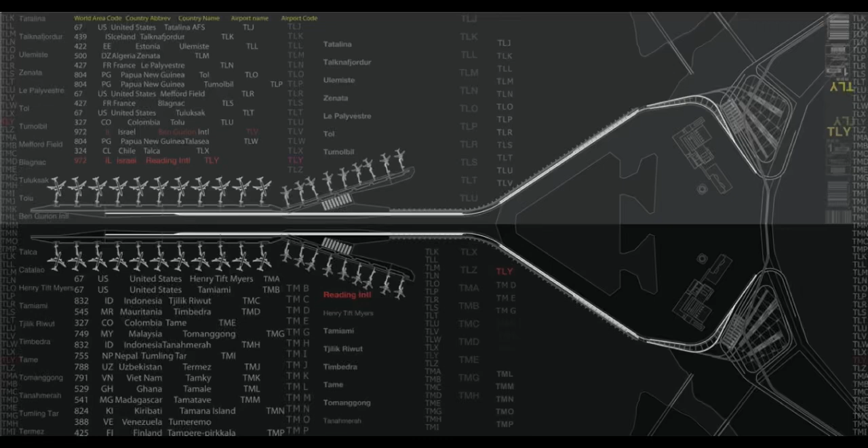There seems to be a notable paradox in the very essence of the modern airport. On the one hand, it is a 24-hour-a-day setting for the most intense kinds of human activity. In that sense, an airport terminal ought to be considered an occurrence of a genuinely urban nature.

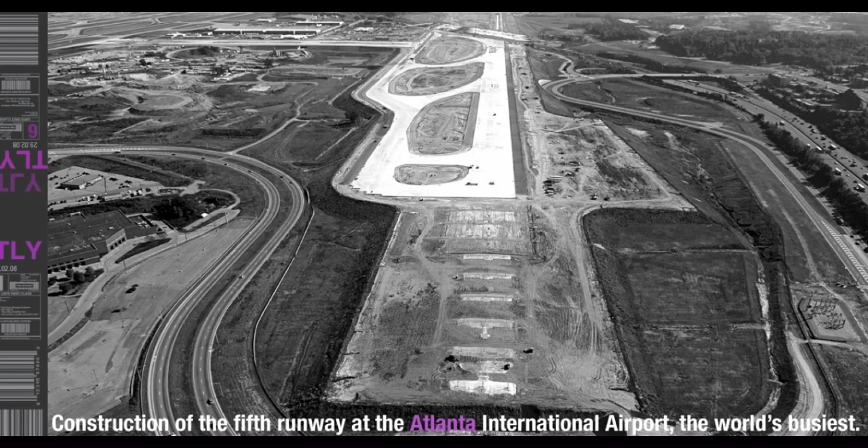Yet this intense and inherently urban constellation of programs is almost certainly doomed to be detached from the city. It generates vast residue of unbuildable territory around it. Wherever a plane lands or takes off, the city literally ceases.

Ben Gurion Airport is a typical example. Even with a recently inaugurated terminal, aviation officials forecast that in the near future it will top its passenger capacity of 16 million per year. Ben Gurion has effectively exhausted its ability to grow on the expanse of the Tel Aviv metropolitan area.

The solution, then, will probably have to come in the form of an additional international airport, relieving Ben Gurion of some of its burden. For obvious reasons, the closer to the center it gets, the more sense there will be in realizing it. The closest thing meeting this particular requirement was a scheme that has circulated the corridors of various planning agencies for some 30 years.

Yes, the one with the artificial island off Tel Aviv's shore. As overboard and audacious as it may sound, we actually liked it, thinking it might be a good starting point.

To understand the nature of such an undertaking, we enlisted the aid of the Kansai International Airport in Osaka Bay, Japan, the quintessential forerunner of this particular genre, as a reference. A short analysis led to two conclusions. The first is that landfill technology is immensely expensive, severely harmful to the environment, and overall obsolete.

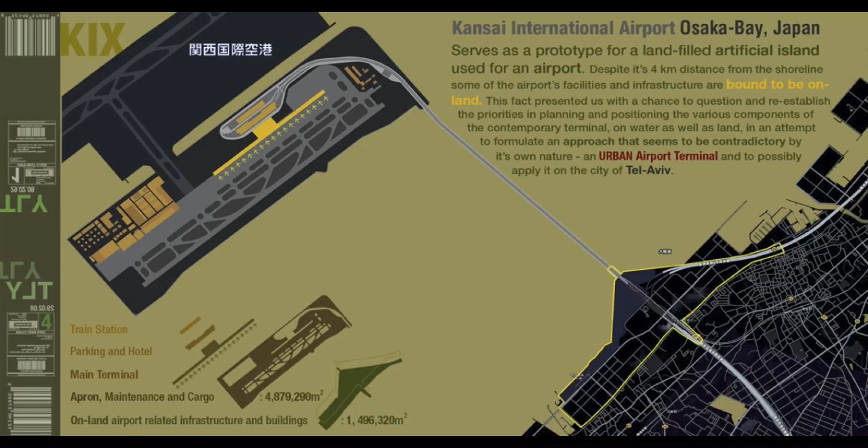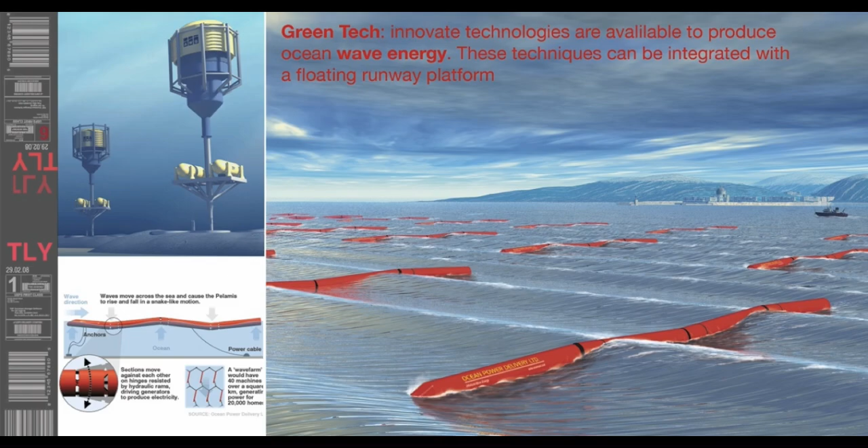Instead, it is possible today to use floating steel platforms with a runway on top, thus minimizing the negative effect on the marine ecosystem, and even turn wave motion into electricity. Secondly, a big airport cannot be located entirely at sea, and Kansai is no exception. Some of its supporting infrastructure and program are simply bound to be on land, occupying a generous chunk of it.

The realization of that later conclusion, with Tel Aviv conditions in mind, took our planning strategy one step further. This meant placing as much of the entire terminal apparatus on land as possible, effectively dividing all of its functions along the dialectic framework of man versus airplane.

This simple programmatic dissection can offer the terms to the drafting of quite a new type of airport terminal, a genuinely urban one, exploiting this condition of complete proximity to the city and acting as a densifying agent with its size to its advantage.

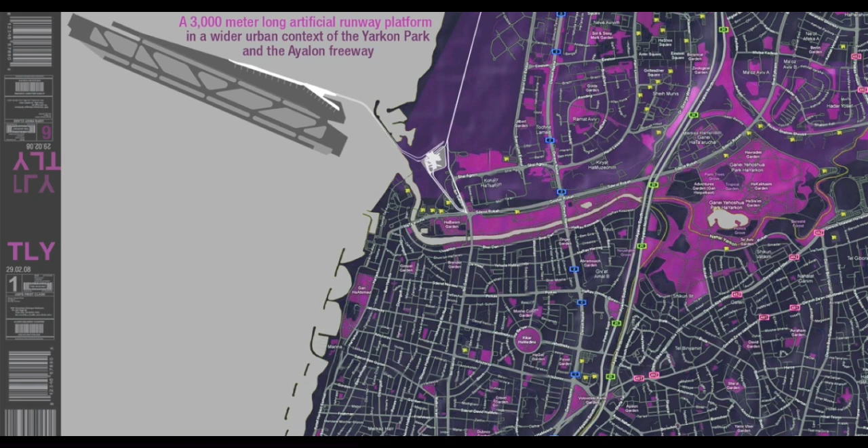Upon examination of the Tel Aviv coastline, where clearly a large infrastructure intervention can only be held north of the Yarkon estuary, a site is spotted to the southeast of the Reading power plant, situated directly behind it. The exact positioning of the runway relative to land is determined with accordance to the aircraft noise levels diagram. It allows to establish the shortest possible distance between the two within tolerable levels of noise.

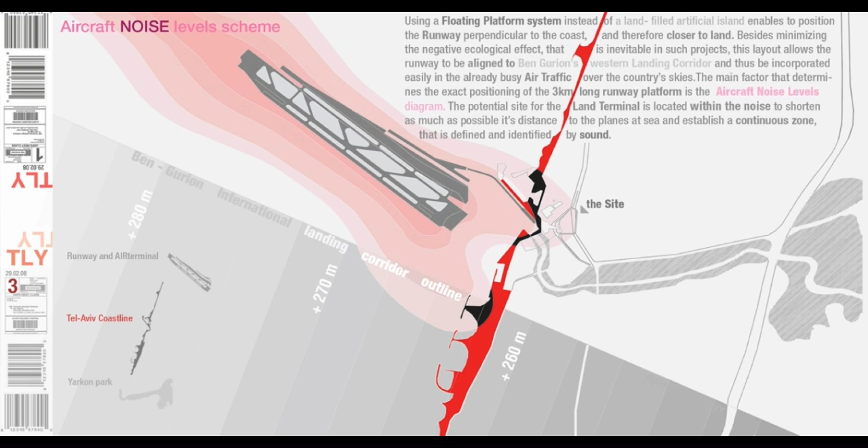In many ways, it is an urban void. Because of its sheer size and unflattering proximity to the plant, it has repeatedly escaped any long-term planning resolutions and remains an unidentified and severely neglected zone. It is possible, then, that a radical intervention on a large scale, such as being proposed here, might work in these circumstances after all.

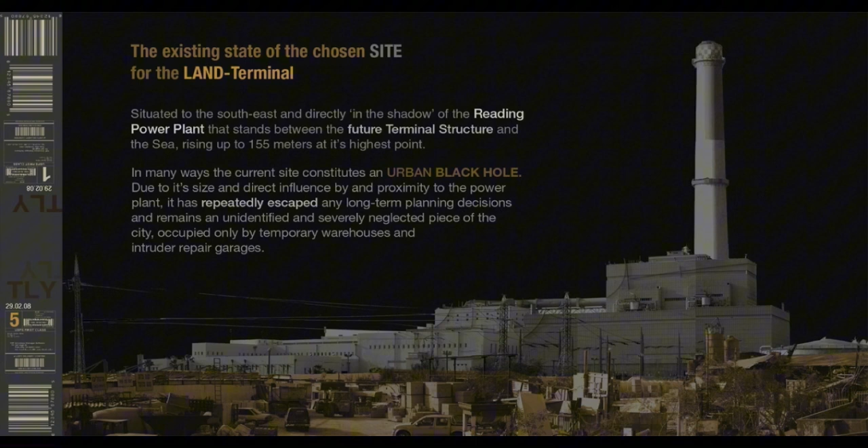The area around the site is expected to undergo a considerable development effort according to existing plans. This includes the Ibn Gvirol Road stretching northwards and the inauguration of the red tram line on it, the continuation of the port promenade along the Reading power plant in the same direction, and finally, the removal of the Dov airfield in favor of a large residential development.

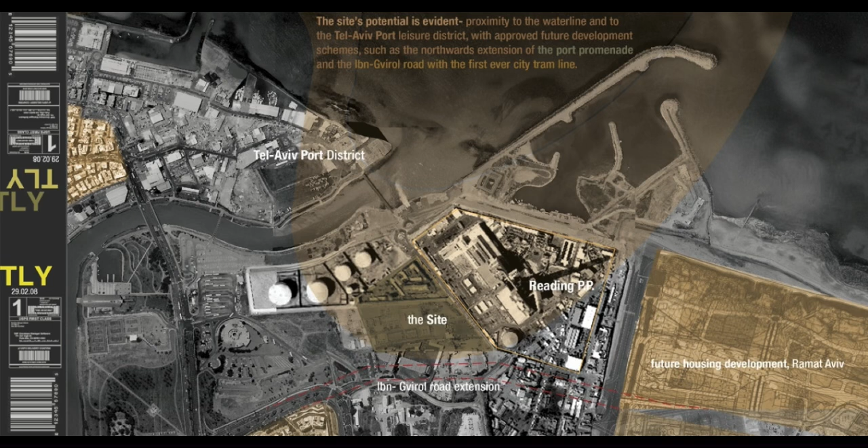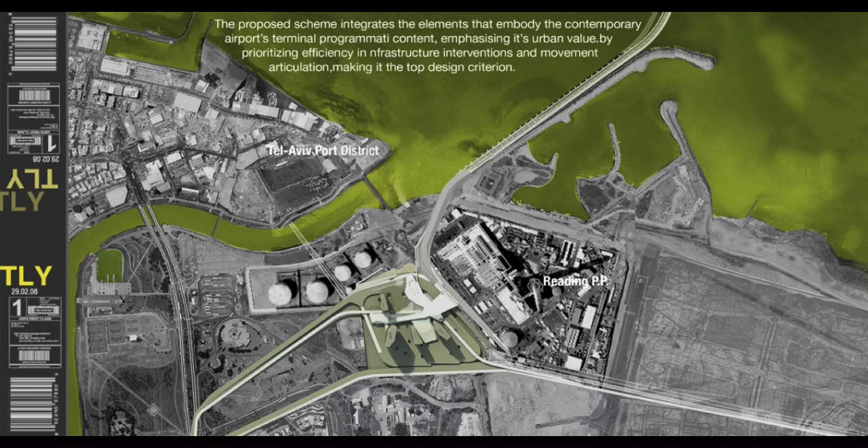The terminal structure incorporates the existing infrastructures in defining its layout. Its principal concern is movement, be that of pedestrian, vehicular, or luggage. Movement forms its priorities and shapes its architecture.

A circulation scheme is devised in accordance with four main principles. Accessibility: pedestrian and bicycle accessibility and circulation are prioritized, a feature that basically sets the urban terminal apart from other types.

Check-in: luggage conveyor belt facilities are placed throughout the building, enabling to disperse efficiently the check-in activity at a number of entry areas within the complex.

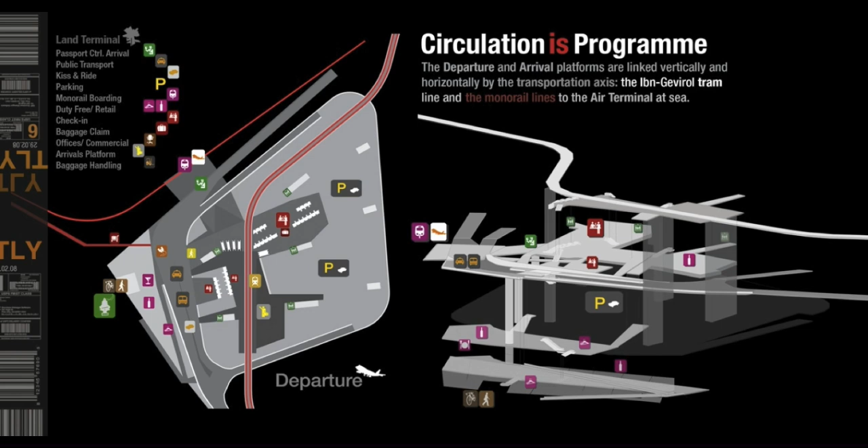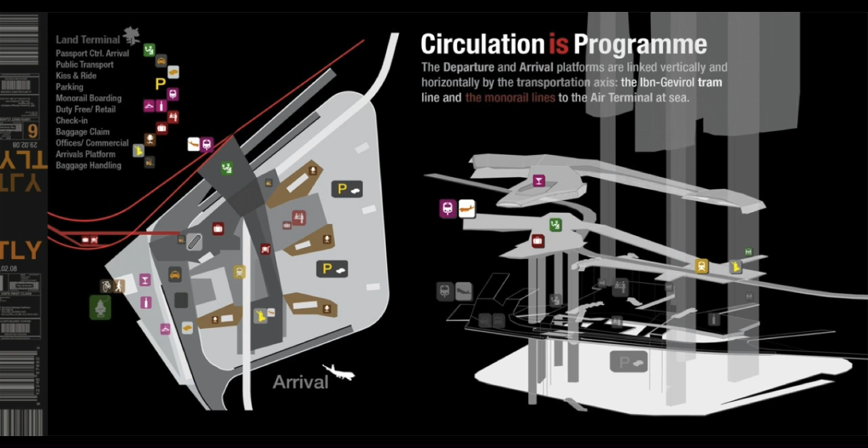Transportation axes: the arrival and departure platforms are linked vertically by the city tram line, crossing the building, and the monorail that connects them to the airside terminal at sea.

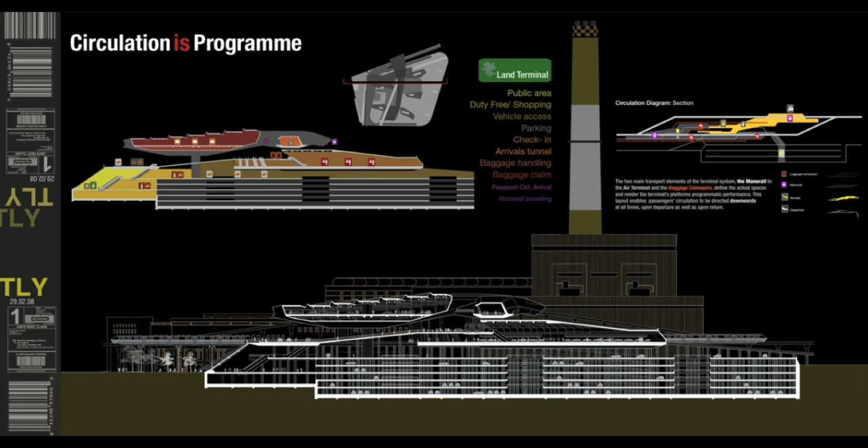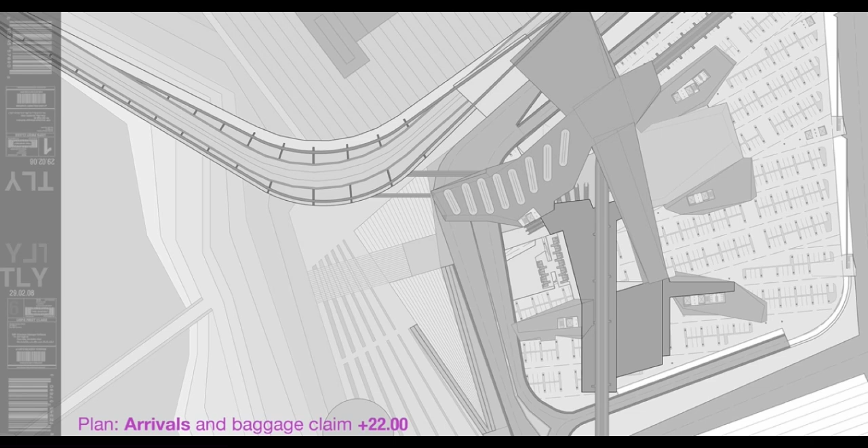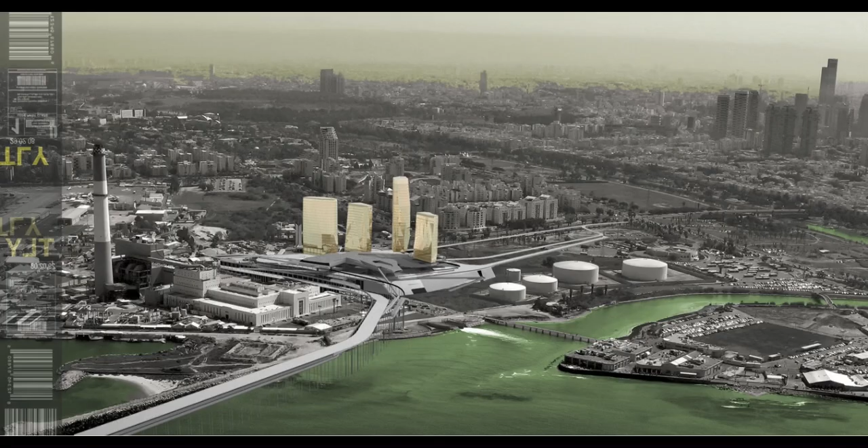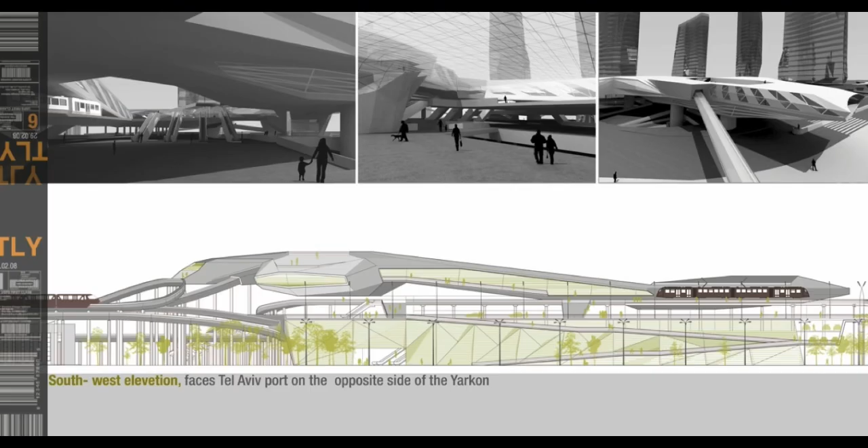Tel Aviv's Port District is assuming a greater role in providing a setting for various leisure and commercial programs in recent times. This area bears certain embedded urban features that can be exploited and reinforced. We propose to do so by introducing similar programs, only in a much denser envelope on the other side of the Yarkon. A city terminal accommodates not only those who come to board on an airplane there, but also has a wider role, facilitating accessible public spaces.

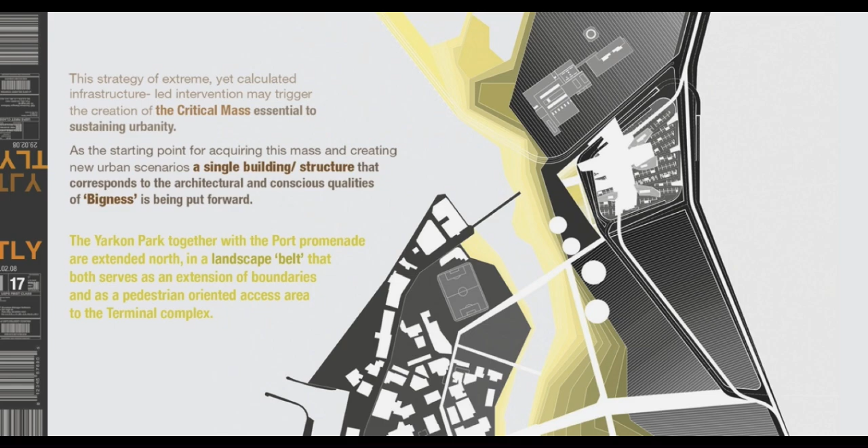This strategy of large yet calculated infrastructure-oriented intervention into an urban void can, in our minds, trigger the introduction of critical mass essential to sustaining urbanity. The result is a kind of orchestrated vortex of moving parts, structural elements, and envelopes that add up to a dense, low on excess, and, despite its evident enormity, a rather compact building.